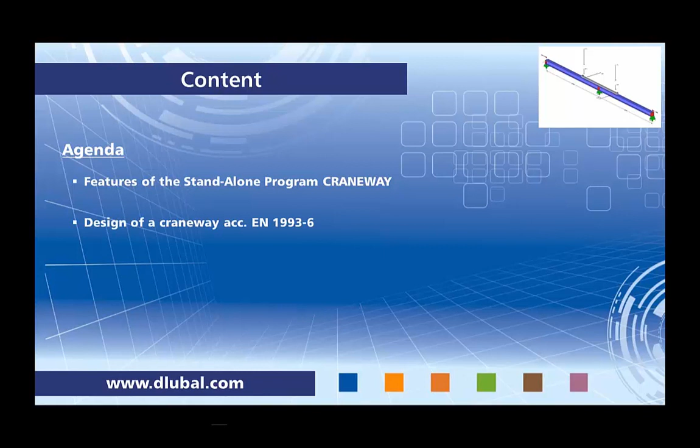Today's content: first, I will show you the features of the standalone program CRANEWAY, followed by the design of a craneway according to Eurocode 3 Part 6.

So first let's talk about the features of the CRANEWAY program. CRANEWAY is a standalone program, which means that it's completely independent from other programs like RFEM or RSTAB. You don't need to define different parts of the model, you just have to define the craneway itself, and this leads to fast and comfortable modeling and design.

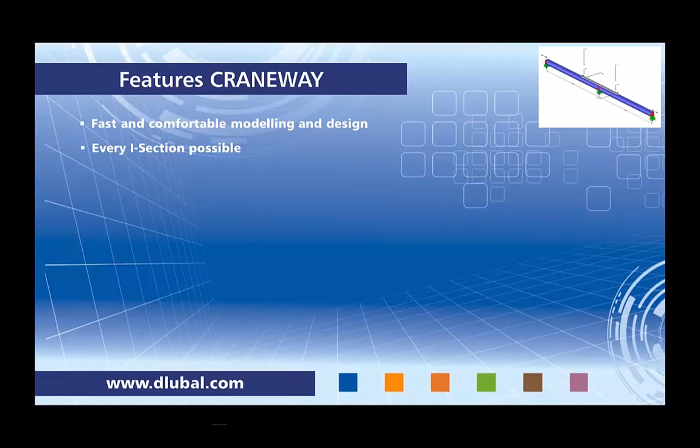You can use every I-section, like welded or rolled I-sections, and you can strengthen them by channel profiles or angles. You can define up to 3 cranes with a maximum of 20 crane axes. One of the biggest advantages of the standalone module CRANEWAY is that you can have an automatic combination of load cases for different design situations like fatigue, ultimate limit state, or serviceability limit state.

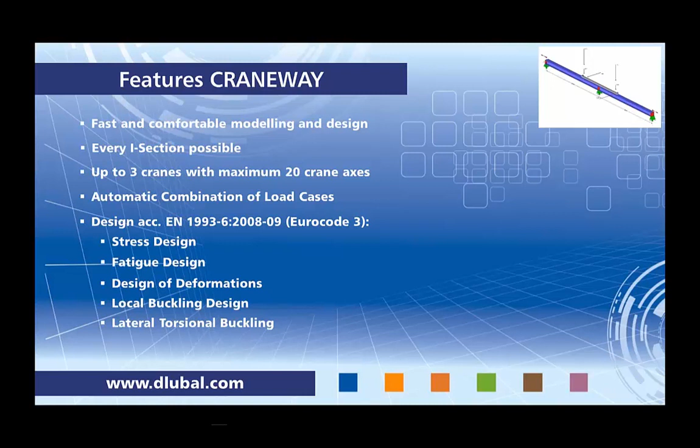The design is according to Eurocode 3 Part 6, which includes the stress design of the crane, fatigue, design of deformations, as well as the local buckling design and the lateral torsional buckling design according to the P-delta method or second order theory, including the warping of the cross-section.

Another big benefit of CRANEWAY is that you can have a presentation of the results in graphics, like deformations and bending moments, as well as a full printout, which makes a provable static calculation of the craneway possible.

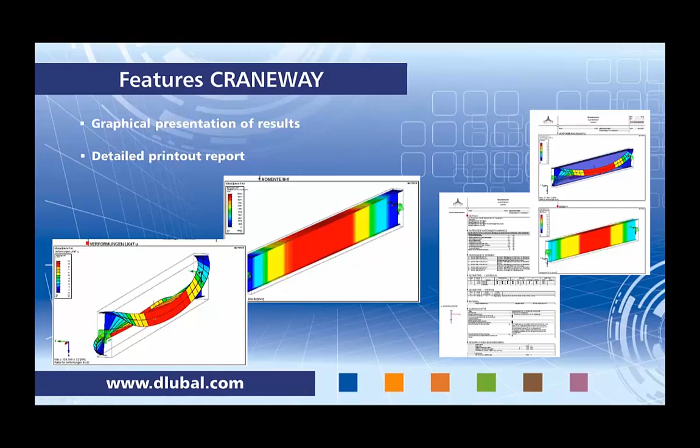Now we will move on to the CRANEWAY program itself. It might look quite similar to you if you are already using RSTAB or RFEM. In the first step, I will just define a model. In this case, let's say I want to define craneway webinar.

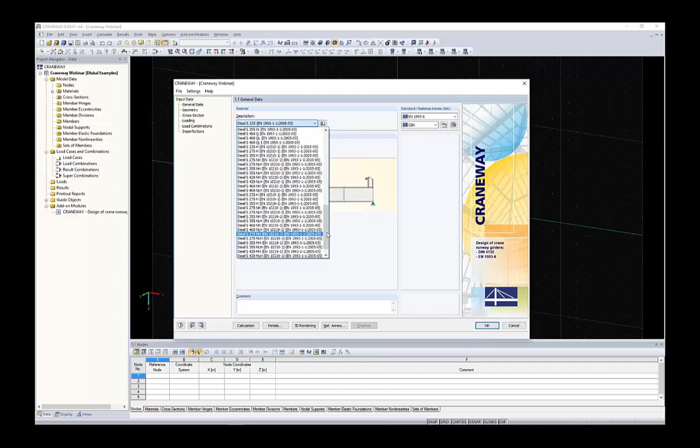In the first mask, you have to define which material you want to use. I will just use S355. As you can see in the list and also on the link, you can use a material library, as you already might know from the other programs. You can define a new material if you don't find the correct one for your calculation, but in this case I will just use S355.

You have a design possible according to DIN 4132 for Germany, and according to Eurocode 3 for the European Union design for several national annexes. If your national annex is not available in the module, you can easily define a new one and change partial safety factors according to your needs.

Today I want to define a bridge crane, and I want to define it according to EN, which means the formulas and variables included in the main standard and not in the national annex.

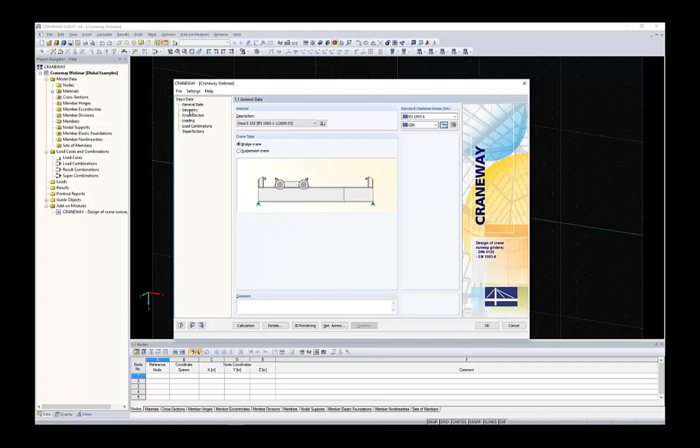In the next step, I have to define the geometry of the craneway. As in the main view in RFEM or RSTAB, you can easily rotate, zoom in, zoom out as you wish, and check your structure. So I like to work in isometric view, I can use this one.

Today we have an example of a 28-meter craneway. On the bottom I have to define the supports: we have an intermediate support, and at the end of the craneway at 28 meters.

There are several standard types of supports like hinged movable as an intermediate support, and it will give you the automatic definition of the displacement and rotations, which is disabled at the moment. But if you want to define a full user-defined support, you can easily use user-defined, and you have access to all the degrees of freedom.

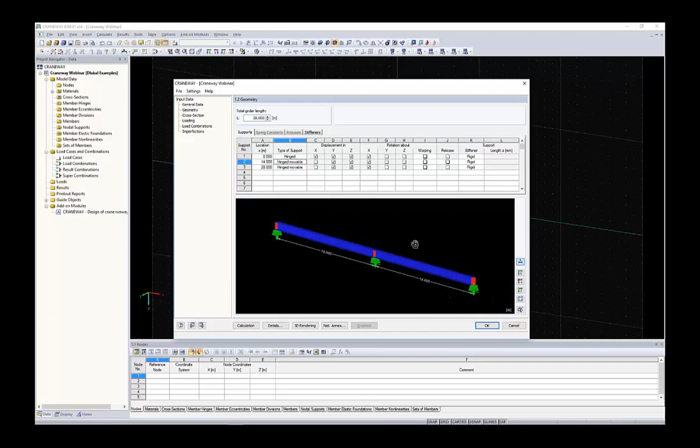You can also use just intermediate support on the upper flange, and you can check it in the graphic. In this example, we just have hinged movable like this, and we want to define a release in the middle of the craneway like this.

In the next mask, you can also check the releases. If you define a user-defined release, you can also have access to the other degrees of freedom, for example to define a shear hinge or just a normal hinge as you wish. I will just use the standard hinge in this example.

You can also use warping supports or hinges as stiff, or you can also define springs in the mask over there. And with the detailed dialog, you can also let the module calculate spring stiffness for warping.

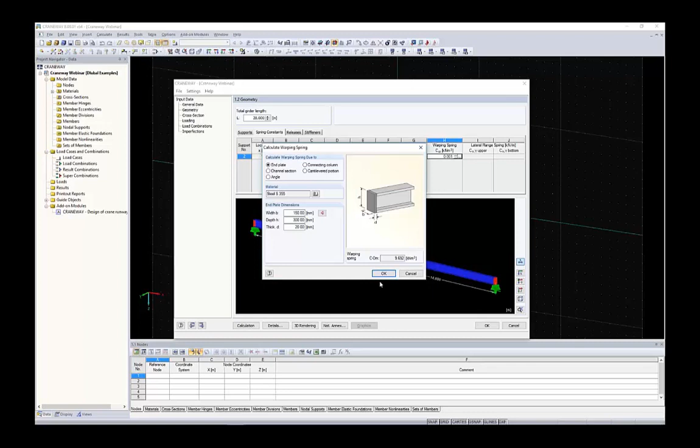In this example, we want to keep it simple, so we don't take the warping into account. Let me just show you the stiffeners. The stiffeners are not for the calculation of the internal forces, but they will define the intermediate panels for the design of local buckling.

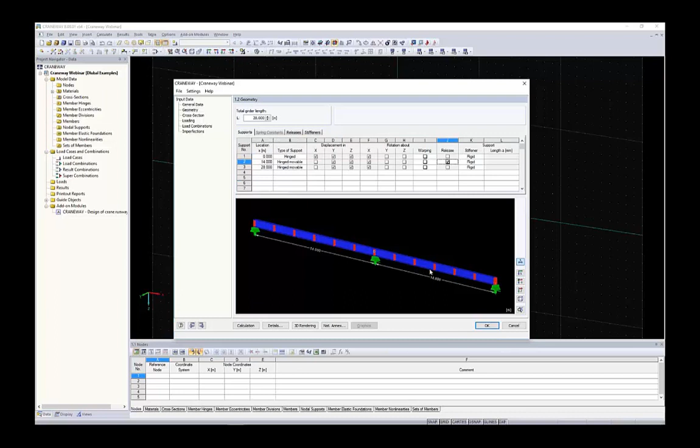So in this example, I want to have 6 intermediate panels on both sides as a regular, or you can even use user-defined and choose whatever distance you want. Regular 6 panels, and that's okay with the definition of the CRANEWAY itself.

We can just continue to the next dialog, which is cross sections. There, on the first step, you can choose between rolled or welded sections. Let me take a look at the rolled sections. You have a filter on the left side for several manufacturers and standard groups.

That means you have quite a big library of possible I-sections, for example ArcelorMittal or standard sections, British Steel, for example.

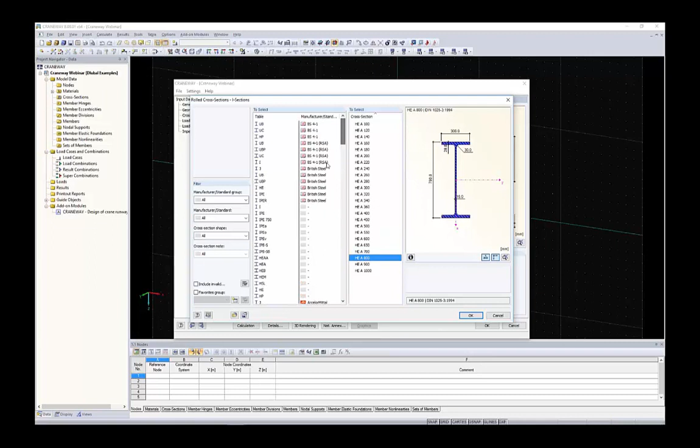In this example, I want to use a welded section, which is quite easy to define. You just have to define these dimensions over there, and the example is 1200 millimeters high, 600 millimeters is the upper flange, 12 millimeters as the web. The width at the bottom is 300, 20 millimeters thickness, and the welds both are 6 millimeters.

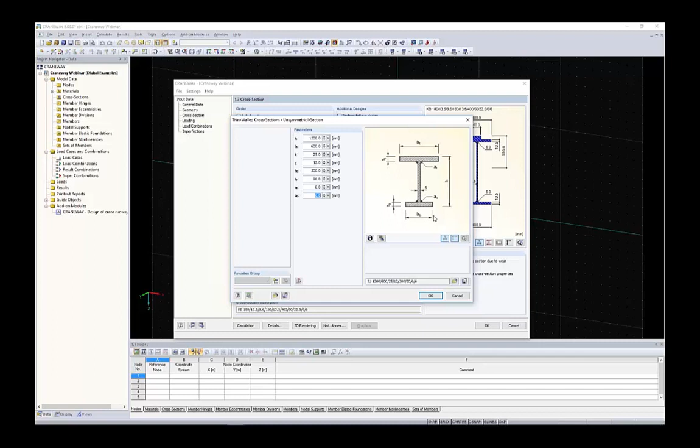The next is to define a rail section. You can both use a splice, like a flat bar on the upper flange. As you can see on the right, you can also take a look at the cross section over there. Define the splice, or in this example, I want to have an SA 75 section, like this one.

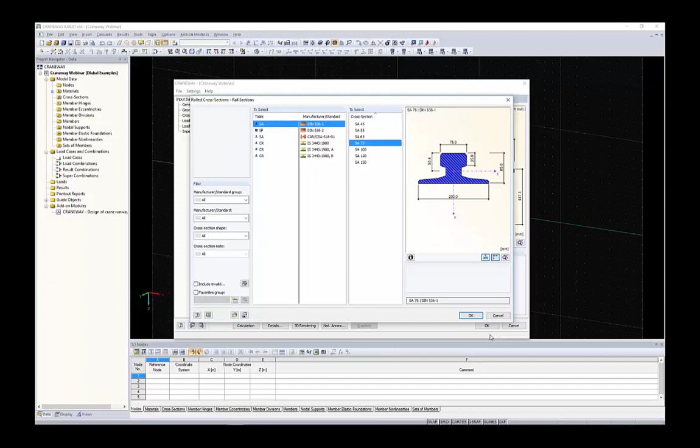On the bottom, you can define stabilizations or strengthening sections like angles on the flange, or rolled sections, which in this case is not possible for this section with a width of 600, but I can easily deactivate it and just continue with this one.

On the right side, you can also see that you can take the wear of the rail section into account, defined by the standard. As you can see, the section properties are modified automatically. You don't have to do anything. You get some info in the section of the rail.

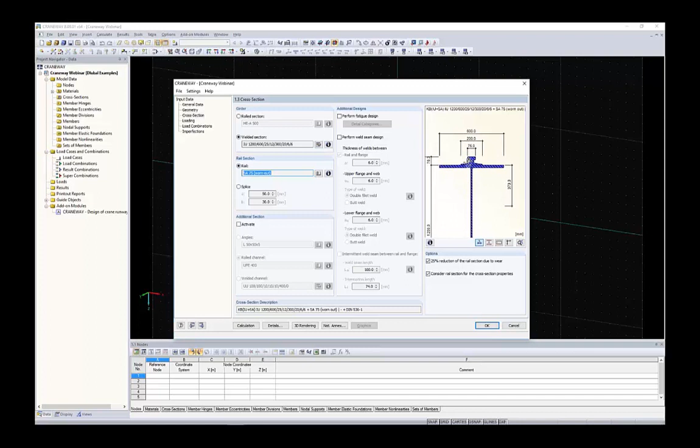In this case, I have elastic support under the rail, so I don't want to take the rail section into account for the section properties. I will just switch this checkbox off, and in the details dialog, in the middle of that, you can see that you can define the rail flange connection. In this case, as I said, I don't want to take the rail into account.

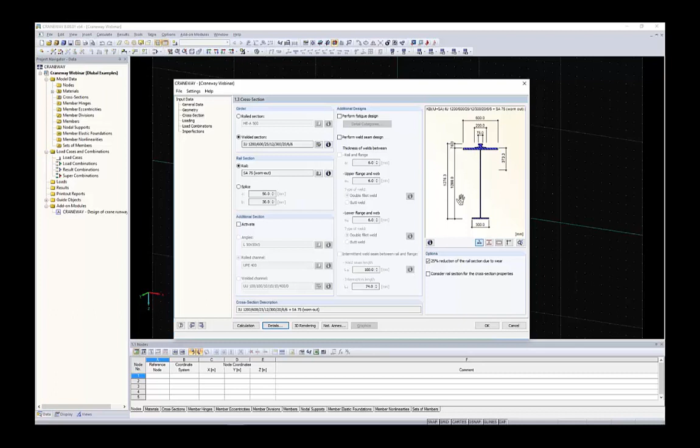That means, as I said, we have an elastomeric bearing pad with a height of 6 millimeters, which is fine. And with this definition, we can just switch to the next mask, which is the loading.

On the top of the loading mask, you can define how many cranes you want to design. On the CRANEWAY, in this example, it's just one. We have a girder buffer on both sides, and we want to design both girders, that means with maximum and minimum loading.

Crane description, this is what you usually get for the static calculation. That means you have a crane you want to take into account, and this data sheet you will find all the loading, the name, and the S-class for this crane.

For this example, I have a, let me take a look, 17 ton crane. The S-class is S5, and over there you can see the dynamic coefficients, which should be clearly visible in the data sheet of the crane, if the loads you have to define are already including the dynamic coefficients, or they are without.

If they are without the dynamic coefficients, you have to define it yourself. In this example, I have to define 1.1 as phi1 and 1.38 as phi2. The rest of the values are already okay.

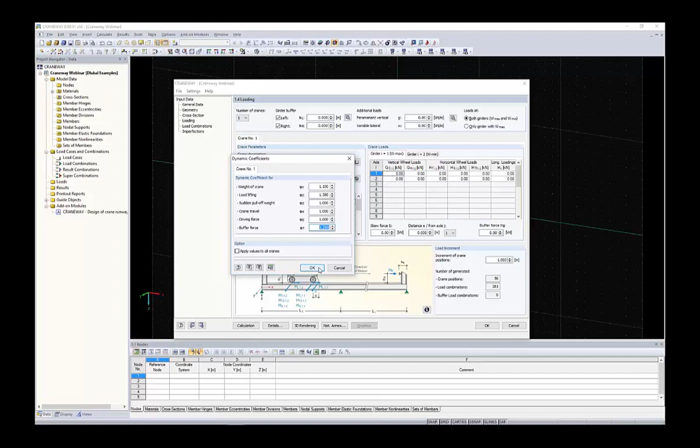And we have a crane buffer of 50 centimeters on both sides. That means the crane can run from this length along the craneway. You will see this in the graphic later.

We have a crane axis of 4 in this example, and the distance between the crane axes is 2 meters, 5.6 and 2 meters.

And the loading I have already prepared in a small Excel sheet, so I will just copy the loads from this sheet by selecting all the cells and paste them with Control V. We have a minimum load on girder 2, because I want to design both girders.

And we also have an additional skew force, minus 20.1.

Now on the bottom you can see we have an increment of crane positions of 1 meter, and this means that we have 56 crane positions, and this leads to...

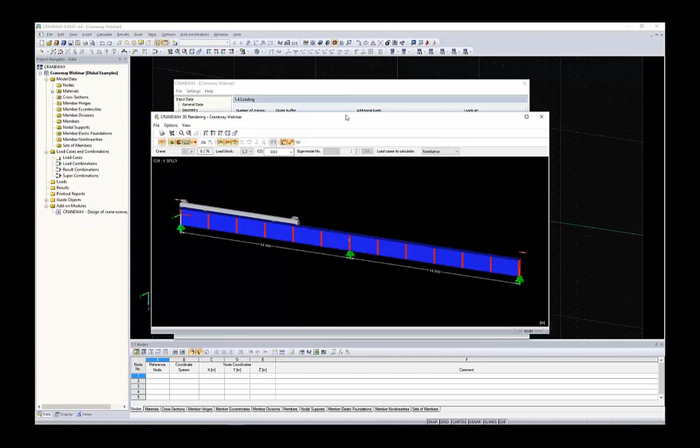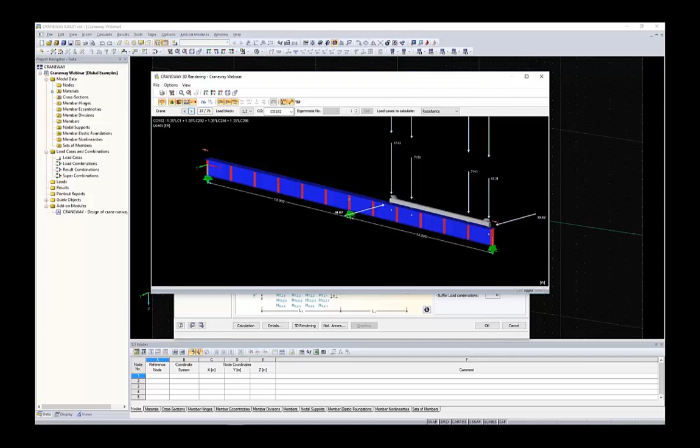You can take a look at the 3D rendering, and there you can check the definition of the crane. We have 4 crane axes with these 2 meters, 5.6 and 2, and this is basically the calculation which is done later when you press the calculation button. The program will calculate all the load positions, load blocks and combinations according to Eurocode 3.

When you just switch back and define a buffer of, let's say, 5 meters on the right side, check the rendering again, you can...

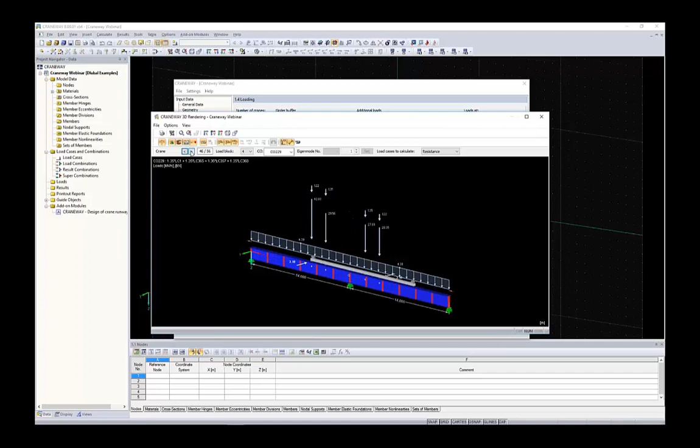Let me take a look at load block 1 and 2. This is this one, yeah, you can see the distance that the crane has, a distance of about 5 meters on this side. The loads are not appearing above the support over there. But on the left side, the loads will be above the support at the X location of about 0 meters.

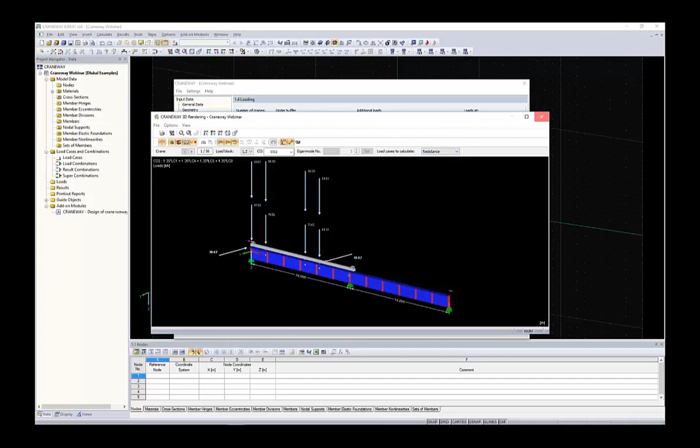So you can check all the load combinations and all the crane positions in the graphic, like for the resistance, for fatigue and for deformations. Let me just switch back to the crane buffer of 0.5 meters.

This is also what you can use for the craneway if you have more than one crane and you want to keep the distance between the cranes. You have to define the buffers.

So in this mask, I think we are finished and we can take a look at the load combinations. This is more like an overview for you. You can see that for the resistance, you have an amount of 381 load combinations with the partial safety factors, the crane positions and so on.

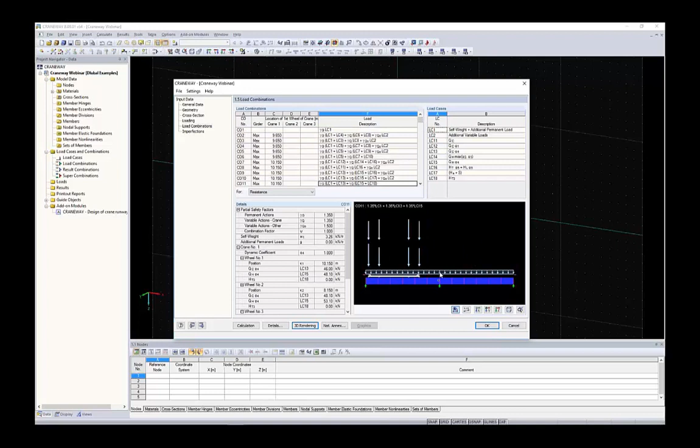So if you imagine doing this manually, it would just be really time consuming to get all these load positions and all these combinations done. In this case, it's a very big advantage, I would say.

Let's take a look at the imperfections. Imperfections you can both define manually in the module, or the program CRANEWAY will define them automatically for you according to the buckling curve, and it will apply the imperfection according to Eurocode 3 automatically. So right now I can just run the design.

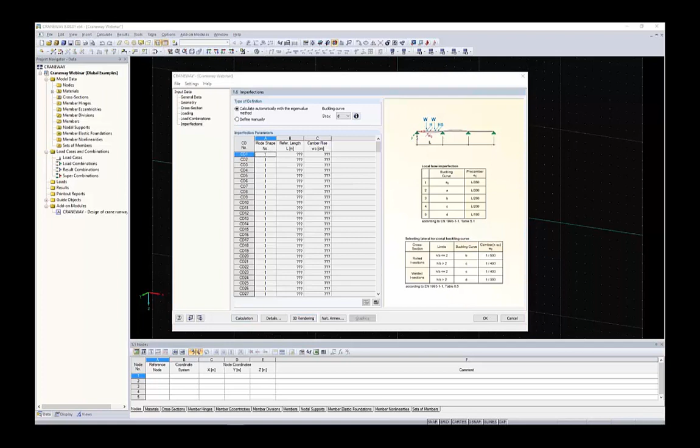It will take some time for the 381 load combinations. There are 2 ways of calculation implemented in this program. You have a fast calculation, which means that the design will run according to first order theory first, and then the worst load combinations and design situations will be designed according to the P-delta or second order theory calculation method, including the imperfections, including warping of the

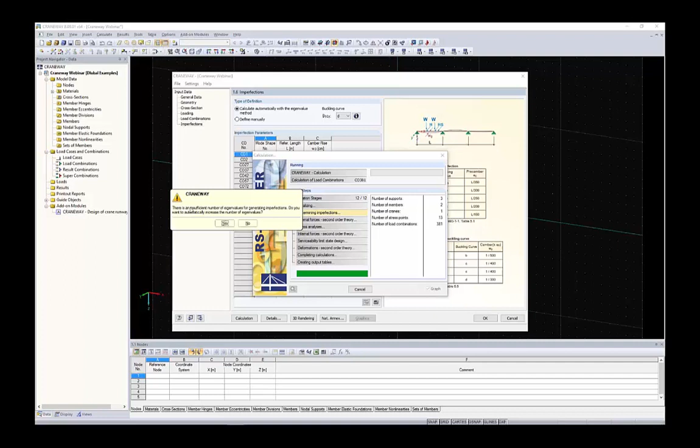construction. So if you imagine designing all the design situations and all the combinations according to P-delta, including imperfection and warping torsion, it will be a lot more time consuming, and therefore we have a fast calculation and a detailed calculation. If there is insufficient number of eigenvalues, you get a warning hint, and in this case we want to increase the number of eigenvalues, of course.

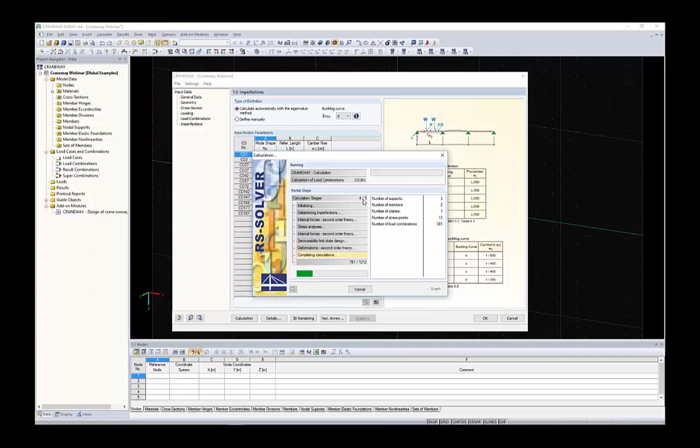So these are the 12 design combinations we have. Of course, in this design situation 77, we have to design according to the P-delta method, but it's less than the 381 before. Now the calculation finished, and you get a design summary like in other additional modules. For example, Steel EC3, you get results as a design summary, internal forces, support forces, stress analysis, and so on.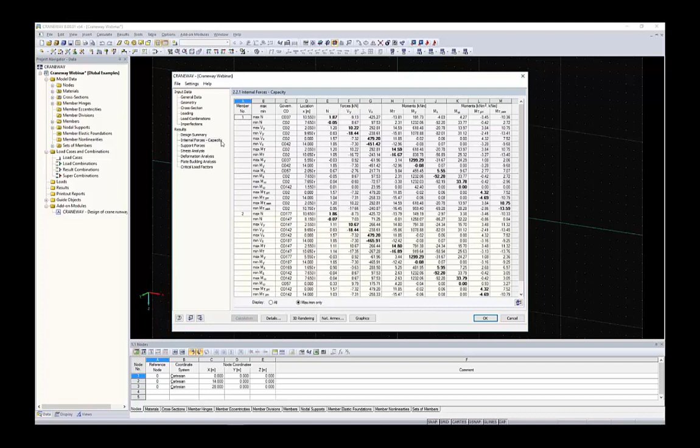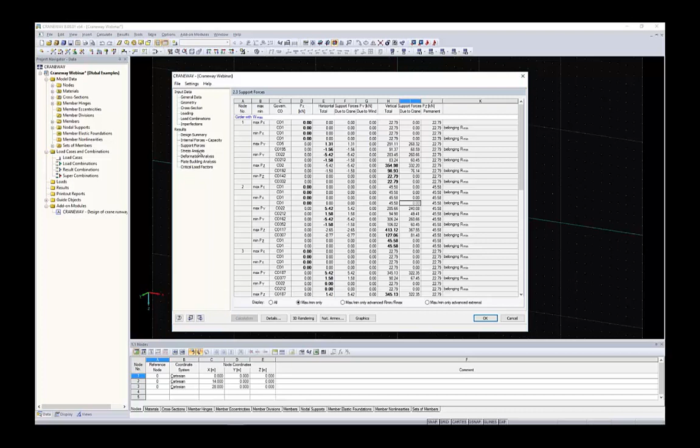You can also take a look at the internal forces as well as the support reactions. And with the File Export Tables button, you can also export these support reactions, for example, to have them for further work in RFEM or RSTAB. You get also the plate buckling design, and what might be also interesting for you are the critical load factors for several load combinations.

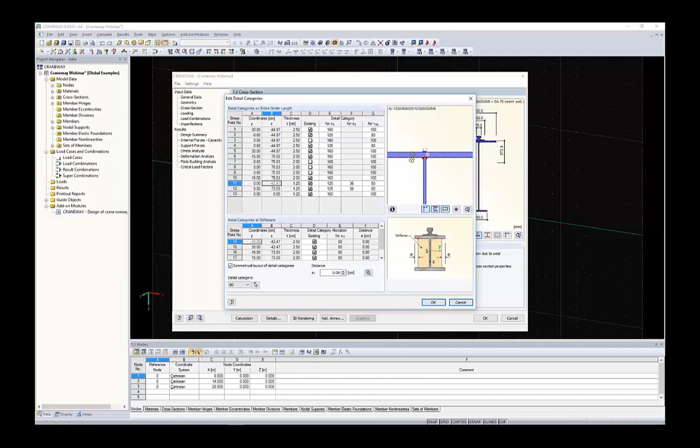The module also gives you the opportunity to get the welding and fatigue design, and this is what I want to perform now. So I switched back to the cross-section mask and activate fatigue design as well as the weld design. So we define the weld thickness of 6 millimeters over there in the cross-section. And first we want to try it as a double fillet weld. And when you take a look at the detail categories, you get all the details for several stress points along the cross-section. You can also check the position of the detail category in the graphic.

And when you click on calculation, you can see it's quite fast. It doesn't calculate the internal forces again. And you can see that it's quite overloaded. The fatigue design is about 400% now, and therefore I have to modify something. You can also take a look at the overloading detail like sigma X, and when you take a look over there, it seems to be okay. But on the bottom you can see the sigma Z stresses, and this seems to be overloaded.

Over there you can see the sigma Z stress is overloaded, and therefore I have to improve something. What I can do now is I switch back to the cross-section dialog, and I will change the weld of the upper flange and the web over there. You can take a look at this graphic, and in this case I want to use butt welds. That means the web is fully welded through at this position. I just have to change the radio button over there.

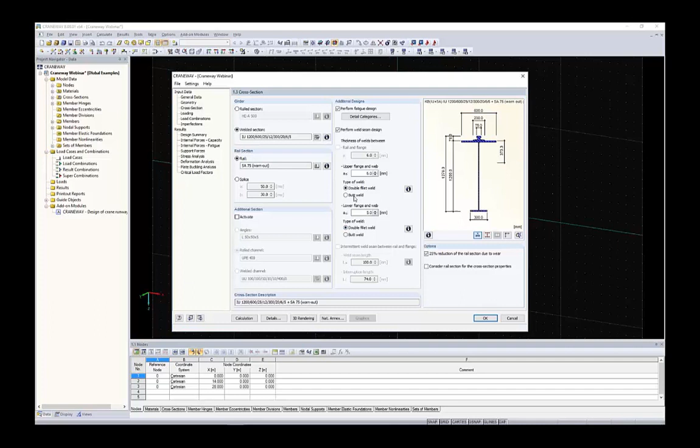This was a small fault because it's still overloaded. I changed the type of the weld on the bottom, but I want to have it on the top of the web. Run the calculation again. And now you can see it's fine. Fatigue design over there. We can also take a look in the detail of the fatigue, and this seems to be okay now.

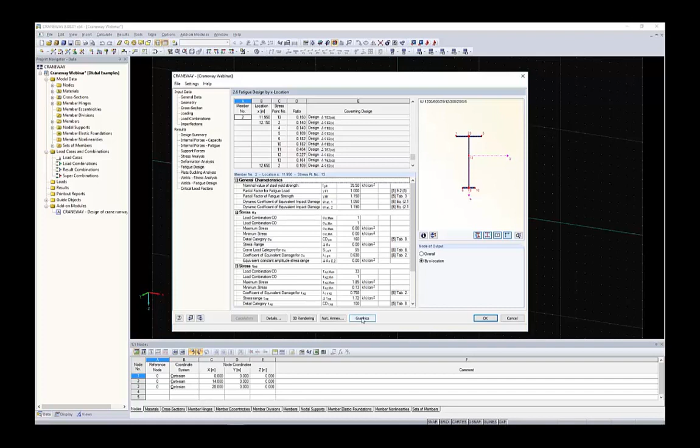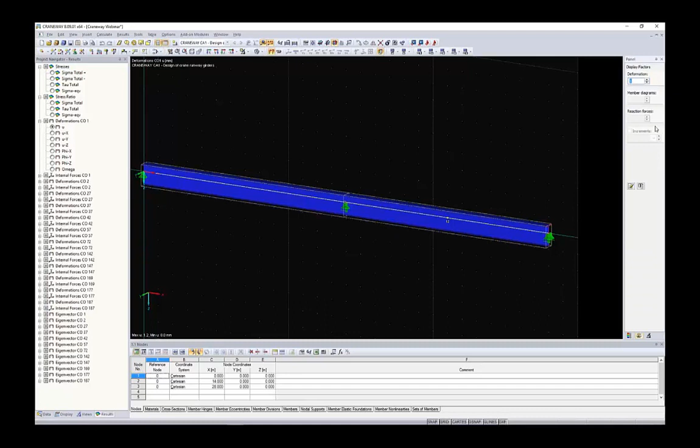You can check all the results in the graphics, but you can also use the Graphics button over there to have a bigger view in the program. You can also change the way of displaying the deformations, for example. This is a sigma stress, so first of all I want to change the deformations to U. I can increase the display factor just a bit, but this looks not very satisfying in this case, because just a line for deformations is not too useful, I would say.

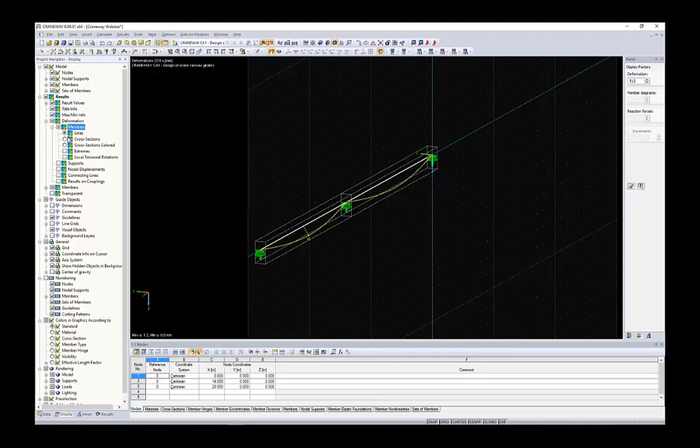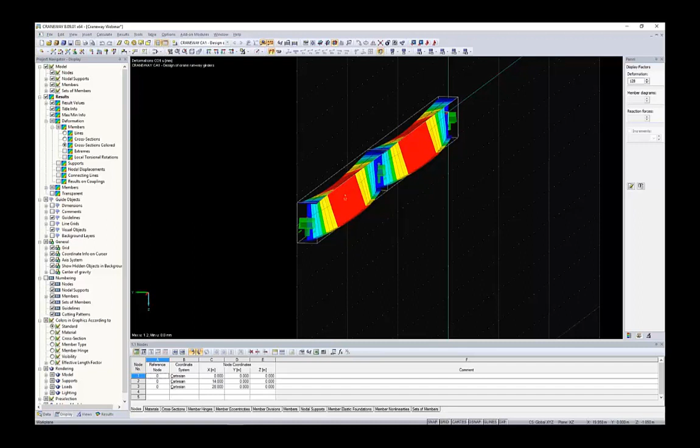So in the display dialog over there, you have the results and you have deformations, members, and you can easily change to cross sections colored. Reduce the scale just a bit, and there you can see that it's lateral torsional buckling. It looks like lateral torsional buckling deformation in this case, because I think it's the ultimate limit state, and this includes the imperfection according to the first eigenshape, which is, I think, the lateral torsional buckling.

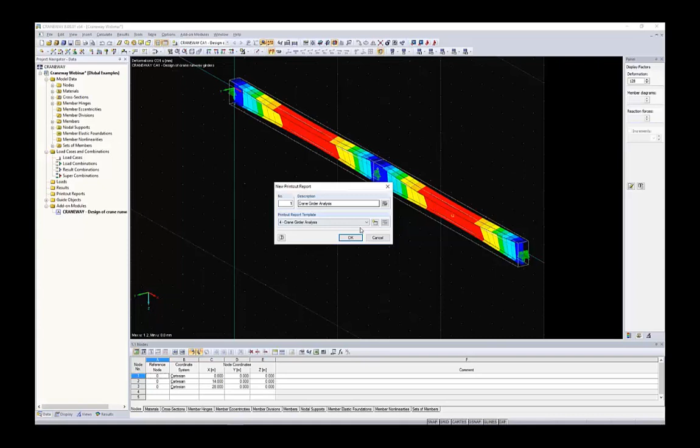Okay. At the end of the calculation, the question is how you can send this to someone to prove the calculation, and therefore we will just create a new printout report. You have templates over there, and therefore I want to use the crane girder analysis as a template. Just open the printout report.

As you can see, the printout at the moment is still German, so easily just change the language to English. So even in this case, you can have a design in the English language, and you can also change, let's say, to Italian, Spanish, or whatever you want to send the static calculation to a different country than you are working in. Yeah. Okay.

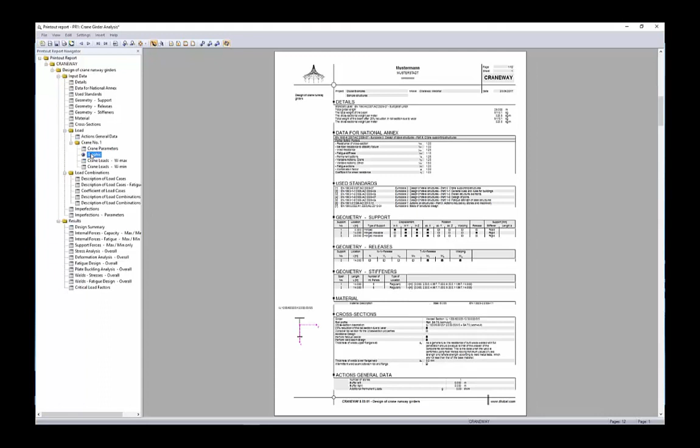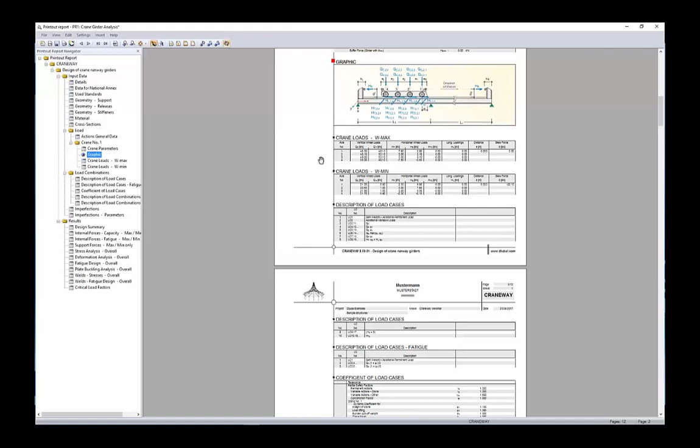Like in RFEM or RSTAB, you get the possibility to print graphics. This graphic of the crane is defined automatically to have an overview about the loads you've defined. But when you just close the printout report, save it, for example, I want to have this shape in the printout, you can easily just print it to report number 1. I only want to have the current one. Okay.

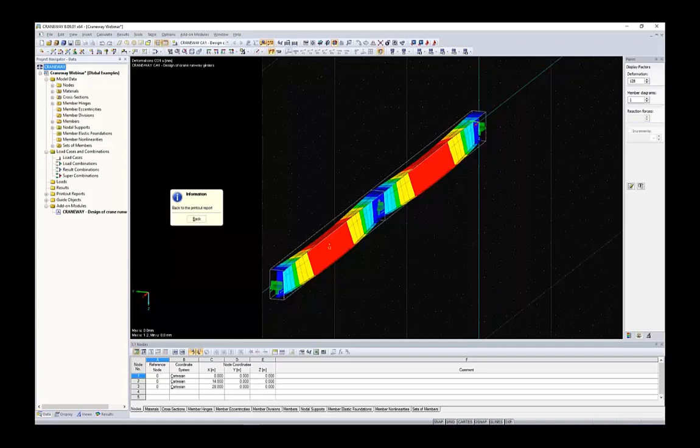And now you get the deformation of the CRANEWAY in design combination 1. If you have some mistake, no problem. You can easily just click on the edit button and change, let's say, to the other side. Zoom in, click to go back to the printout report, and you have modified the graphic. All right.

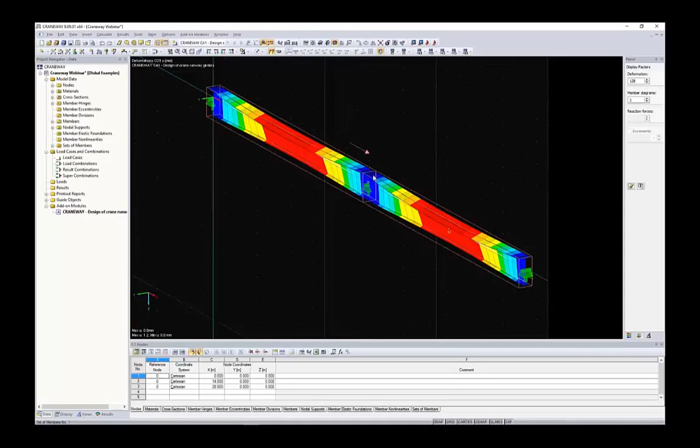Let's save the printout. You can also use the mass print function. Let's say you not only want to have the deformations for combination number 1, you want to have more combinations. It's no problem. You can use the printer button again, but change to mass print settings. I want to have the results of, let's say, deformations combination 1, deformations combination 2, and let's say combination 27 of the current view.

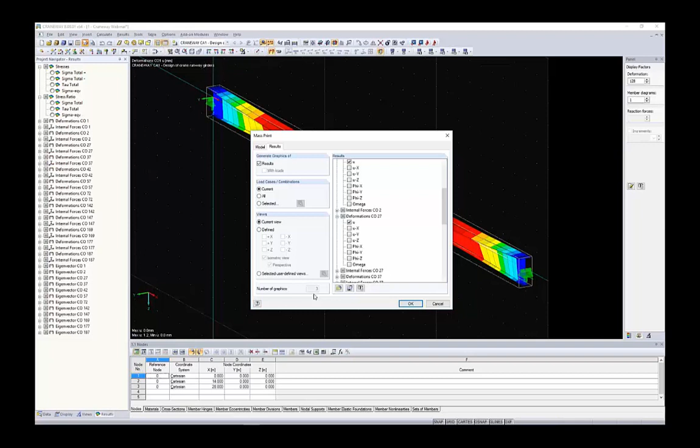And you can see over there you get 3 graphics to the printout report. Window filling, this is okay. And now you get 3 more prints, yeah, for combination 2 as well as for combination 27. So you don't have to print each graphic again and again. You can easily print the internal forces, the deformations, just in one process.

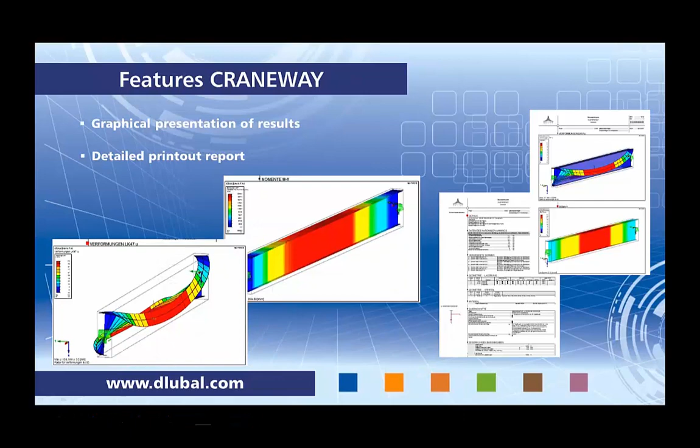All right, let me just take a look at the questions you've sent to us. Yeah, all right. Sometimes we get the question whether you have to define the skew force or the horizontal loads. So I just switch back to loading, and there you can see horizontal wheel loads for the max and min girder, and you have the skew force. So this is basically dependent on the system.

If you define both girders, in my opinion, you should have the skew force only on the minimum girder with the minimum crane loads. If you design just one girder, with this radio button you can decide if you want to define the horizontal wheel loads or the skew force. Because if you design both, then it might be way too conservative, and you always want to have an economic design. So in this example, I've used both girders and the skew force on the girder with the minimum loads.

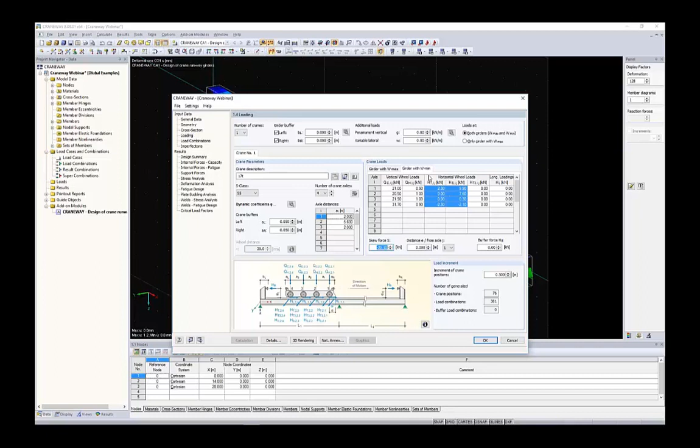So we are almost at the end of the presentation. So just let me give you some additional information. What you can do after the webinar is you can easily just go to our webpage, dlubal.com, and there just move to downloads info, and you will find the download trial version over there for all the main programs like RFEM, RSTAB, as well as the CRANEWAY program.